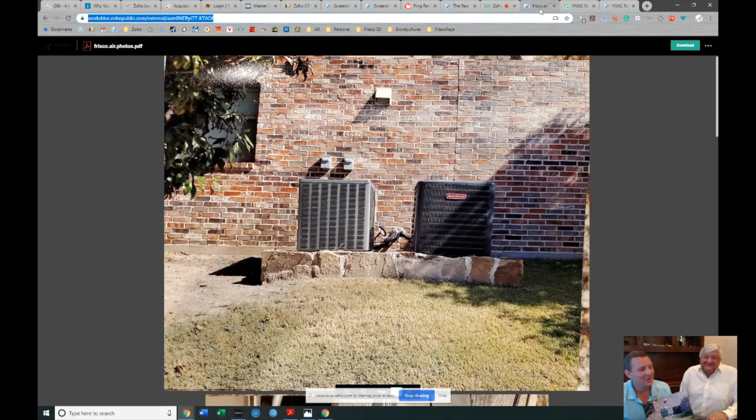That is good. All right, so on the screen everybody can see this now. You have two units here, the one on the left being the older unit, and the one on the right being the newer Goodman unit, installed within a year. Good thing I was able to pick out which one is which.

You were talking about the different quality of units. For sake of us discussing here today, we have some deals and incentives in place, and we're going to talk specifically about Goodman. Tell us a little bit about it. It's just as good as any of the others, and it's less money.

It has a 10-year factory warranty, and that's a very good one. Trane, Lennox, they're good, people think they're better. They're really not much better, they just cost quite a bit more. But if that's what they want, Trane or Lennox, I have no problem putting that in.

But the big thing we're looking at here is if you have a listing that's going up and you want to replace the units completely, once they're done and installed, the next person to buy the home isn't going to say, hey, take that brand new Goodman unit out that is affordable and runs completely fine and does the same thing, and replace it with a different one. They're going to be totally fine.

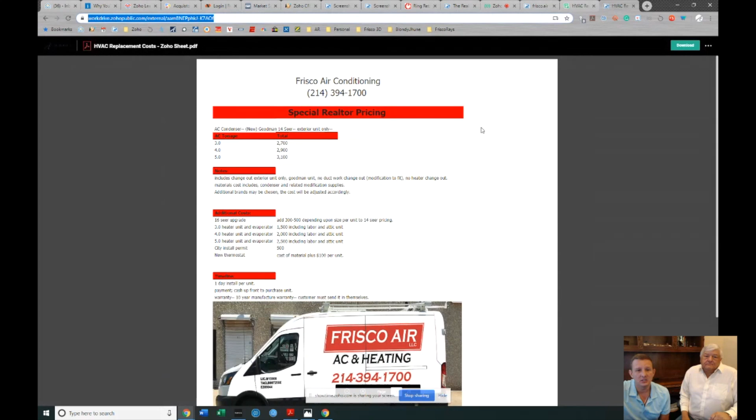I wasn't aware of exactly how affordable this was until we kind of got into it. My dad's really done an amazing job here for us. So let me scroll in here and go back so I can see it. There we go, we can see this a little bit bigger, maybe I'll blow it up even a touch more.

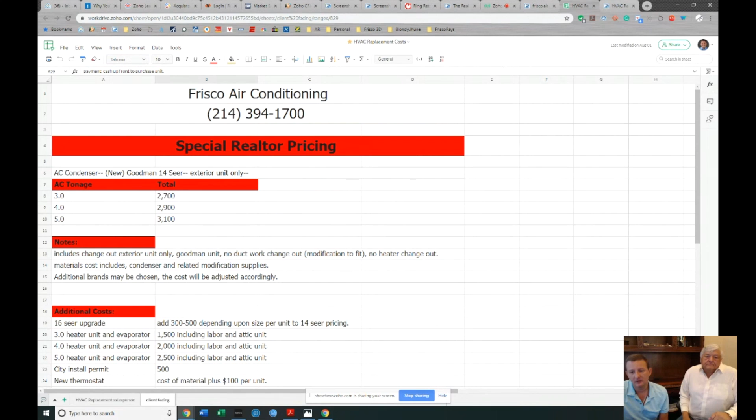So what we have here is we're discussing replacing just the unit outside, the condenser, with a new Goodman 14 SEER exterior unit. And the cost to replace them, there's a couple different ones. For simplicity here, we just said small, medium, large, a 3, 4, and 5-ton unit. And this is the total cost.

So the total cost to replace that unit outside with a brand new one, remove the other one, take care of that, and just replace the unit itself: for the medium is going to be $2,900, for the small, $2,700, and for the large, $3,100.

So if you're just walking around and you just need a number for air conditioning, and you only want to replace the unit outside, my father has an amazing offer for you. He doesn't make a ton of money at this, but it does help our clients out dramatically, so it ends up being a win-win for all of us.

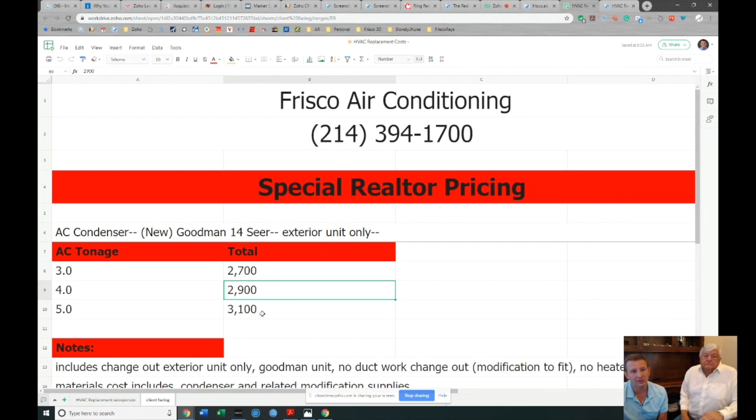And he doesn't service it, he just 100% replaces it. So it's going to pass every single inspection because it's going to be amazing with that transferable 10-year warranty. So just think $3,000 per unit, plus or minus a little bit depending on the size of the unit, for a 14 SEER Goodman.

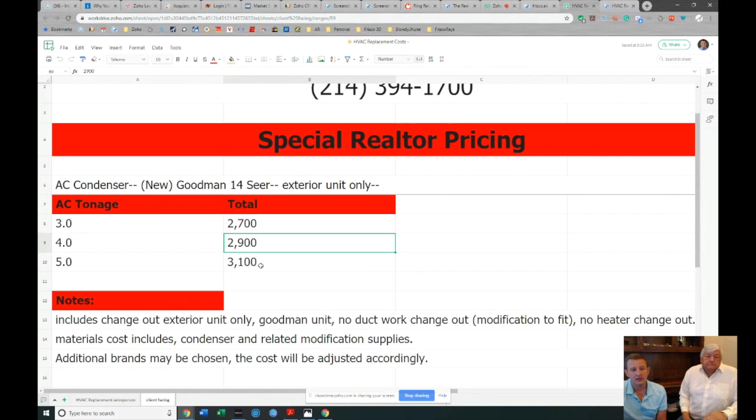You can, of course, change off of that. So we have some special notes here. The fine print would be that includes the change out of the exterior unit only. It does not change the ductwork inside, there would be some modifications to fit, and it does not change the heater out upstairs.

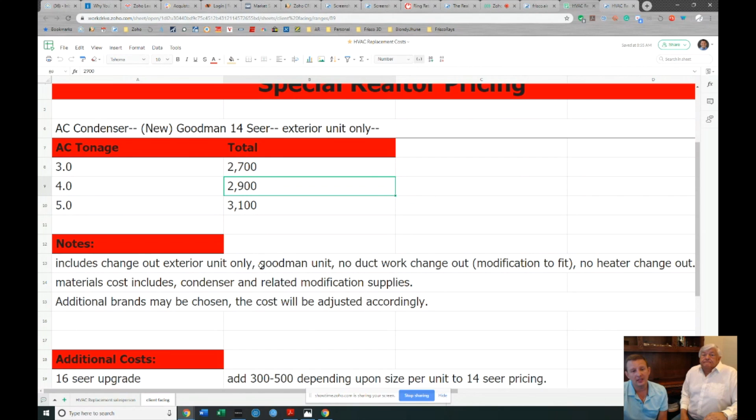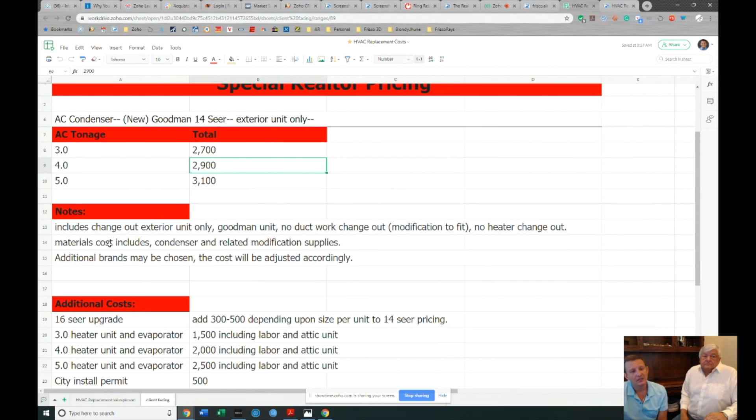Let me see what else I have here, I have a couple things. Material cost includes the condenser and related modifications and supplies. You can choose additional brands, they're just going to be more expensive. And you can upgrade to different SEER rating.

So if you want to put in a 16 SEER, that would be if you happen to live at this house. So if this is for you as an agent, if you want to replace your own unit, you might go with a 16 SEER for your personal property, but you're not going to get any more for that property if you put in a 16 SEER over the 14 SEER if they're reselling it. So we have about $300 to $500 more to add extra SEER.

Extra SEER is just more efficient? Yes, the outside condenser will be much bigger, and what that does is it releases more heat outside of your house. All right, that's a good explanation to me.

And then if you wanted to also add the heating unit upstairs and the evaporator in the attic, then you could have additional charges for those. Think $2,000 for that, plus or minus depending on the size, ranging from $1,500 to $2,500 for the unit in the attic for the heater and the evaporator.

Yes. All right, so that would all be replaced, but that would not replace—we would still use the existing ductwork that is in the attic. Correct. In addition to that, if you wanted the work permitted, then we're going to have to add a bit to that for the direct cost of the permits.

And the thermostats, if you wanted to replace those and change those out, then that would be the cost of the unit plus $100 for the install. And that is extremely gracious. The timeline to replace this stuff is 1 day per unit, might be a little faster if you have 3 units.

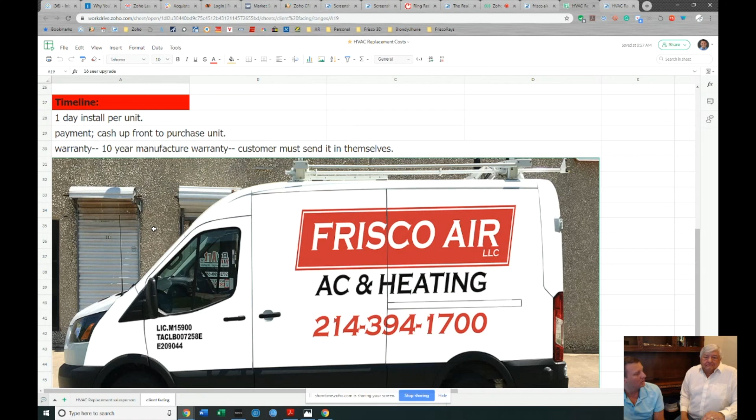Maybe you can get them done in 2 days or something like that. I don't want to push you to be too fast. I want quality workmanship, but one day per unit installed.

They do need to be paid for up front. There's not a lot of profit involved in this. My dad's really kind of hooking us up to make sure our clients get the best possible deal. So the whole thing is designed to just replace it.

If your client or the prospective buyer is thinking it's a $20,000 problem, and the reality is it's just $3,000 a unit—might be a $6,000 problem to replace all of them—they might be like, whoa, I thought that was $20,000. And if you came back, even during a repair amendment phase, and said, hey, we'll replace both units and forget everything else, they'd probably say that's amazing, because I view it as a $20,000 fix.

On the other side is the buyer, and they might release all the other things on your list as well. So this should be a real bargaining opportunity for you as the agent to help your client out. So know these things—it could work on the other side too.

If you have a buyer and you're going through the process, you might know what the cost of replacing just that unit is and use it to your advantage. Ask a question to the other side and see how much they think it is. Go ahead and have it quoted by somebody else, and they'll have a huge number.

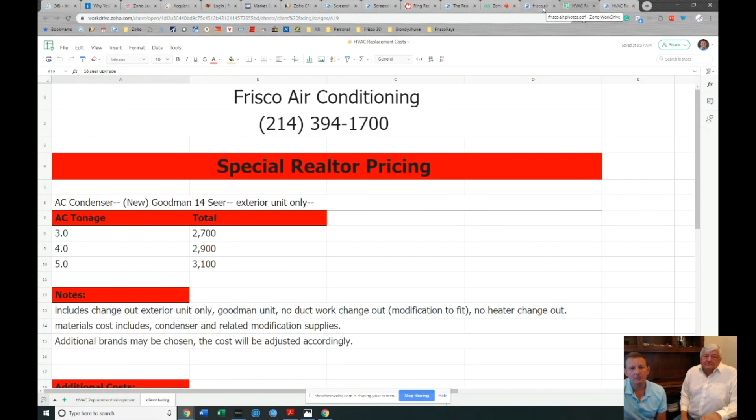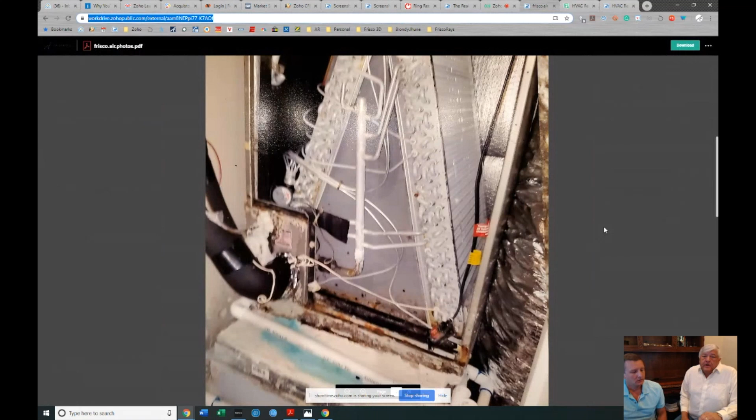Now, you did take a couple of pictures that you thought were important to show off, so let's show what these happen to be. This would be service related—this is the evaporator coil, and that's upstairs in the attic with the furnace. It's attached, so you won't normally see it like that; I took the door off.

That needs to be cleaned every so often. As you can see at the bottom, it's rusty and dirty. What happens is from the condenser, the outside unit, the Freon goes to this evaporator. That coil works like a dehumidifier, and it takes the water out of the house. So you'll always have water in that area when your unit's working, and it goes down the side of that unit. So they need to be cleaned.

If not, you'll see that white pipe at the bottom—that's the drain. Many people get this plugged up, and what happens is it starts to overflow, and there's an overflow valve out at the attic outside. If you've ever seen a house with a rusted look on the outside brick, it's because water is coming out there, and it's not supposed to do that. It's designed so it doesn't go through the ceiling of your house, but it needs to be unplugged. So that's one problem that comes about.

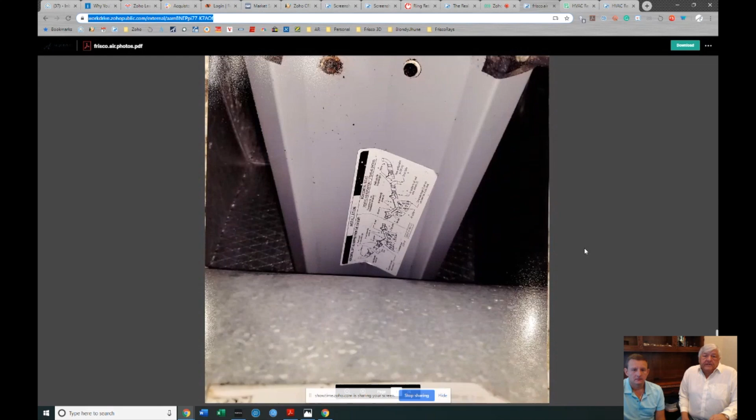This here, you won't know how bad yours is until someone removes the panel. But most companies won't even bring this up because they're in a hurry, they don't want to do this. But that's what it looked like after I cleaned it. So it doesn't have to be that filthy.

If you have allergies, it needs to be cleaned. And now they have a new product out, it's a UV light, and it kills all the bacteria and germs coming through, because it all goes through that evaporator coil. Now that's something that if you have kids that are sick, or you want to be environmentally clean, then that's what you need to do.

Yeah, so it would definitely help if you have allergies, pets, or you get consistent headaches, problems sleeping, sneezing, or things like that. It greatly affects the indoor air quality.

Oh yeah, the UV light. So basically you're going to purchase a unit, drill a hole, put it in, connect it up, and that's going to be right by this thing inside. Yes, it kills everything coming in and out. So that's going to get installed right up in this area? Yeah, and it doesn't attach to that, but it attaches to the side of that unit. And then that's going to clean, it's going to zap all the stuff with ultraviolet rays.

So this would probably be something you could do at your own home if you happen to be an agent and you wanted to clean up your own indoor air quality and be healthier. So if you want to do that, that would be something you can do.

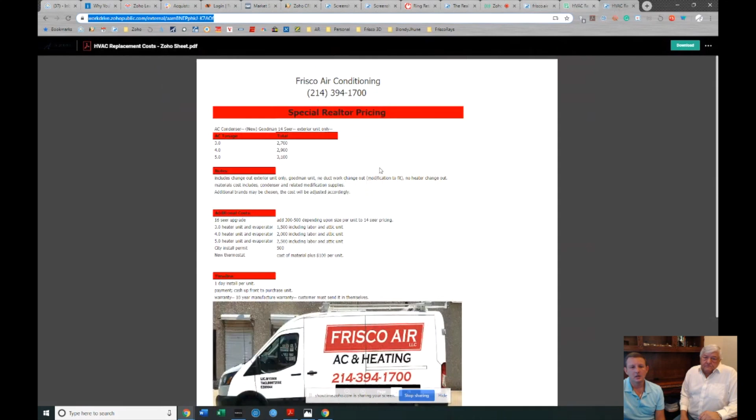I am going to take one more second and show you the final photograph at the bottom. And what we have here is an image of his vehicle. My father has a really nice vehicle, so he's fully professional, not part-time on this, he's full-time. He takes care and puts in the effort and the energy, and it will look good when somebody shows up. They won't have a problem.

You are fully licensed, right? Yes. All right, so he sat through and went through the licensing, which was really impressive. And you enjoyed the stuff. Yeah, I did, I learned a lot. So that's good, and he just displayed all that to us here as he was talking through everything.